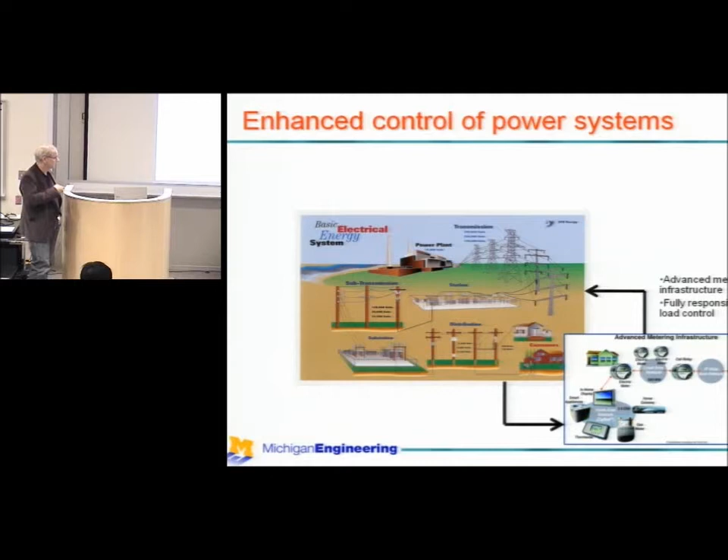So this is a traditional view of the power systems. There's a good deal of activity happening at the load end, and this is where I will focus this talk. There's also activity happening in terms of wide area control. There are issues associated with both parts, both features of this enhancement that link very tightly with cyber-physical nature of the activities. In both cases, one has to deal with issues associated with communications infrastructure and how it impacts on the physical infrastructure. I've done very little work in this wide area control aspect, and will focus my attention down more at the control of loads end of activities.

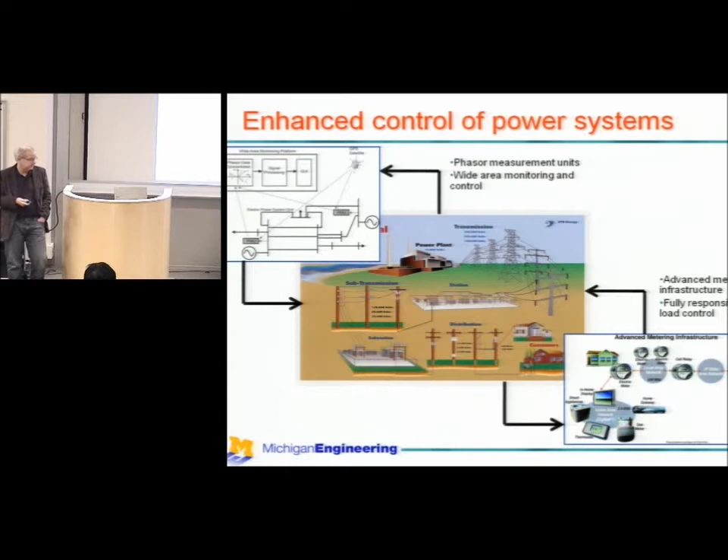Okay, so why do we want to change the paradigm that's worked for a large number of years? Well, the first reason is there's an enormous amount of research funding in the area, so of course we're going to link with that. But a slightly less cynical view of life is that there's a lot of renewable generation that's coming into the grid, and there will be more and more happening over the next few years.

And this figure just shows a snapshot of the variability inherent in wind power generation. So this is a 100 megawatt wind farm in Minnesota. You can see that the output is varying from 0 at certain periods in time. Well, if we look over here, it's 0, and then it's up to about 80 megawatts not that long after the 0 time, and then it's back to 0 again. So the variability is enormous, and it's something that power systems are not designed to deal with.

There's a lot of rooftop solar. There's a lot of other forms of solar generation that is coming along as well, but rooftop solar is embedded in the distribution system, a system that was designed for power flow from substation out towards the loads, and now with renewables that are appearing within that distribution network, one has power flow in the opposite direction, and that can raise issues for voltage control and power flow control as well.

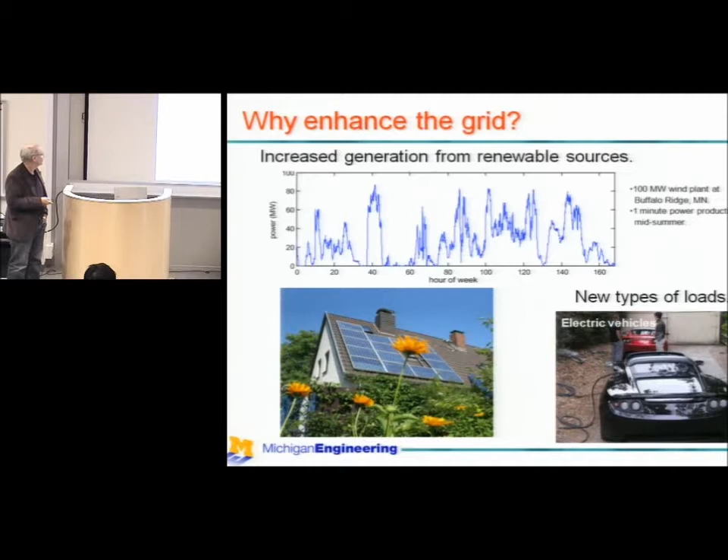The current paradigm in power systems is that load is an exogenous input. Load is what it is. When I turn on a switch, I expect to see electricity supply whatever appliance I'm wanting to turn on.

Generation tracks the variations in what's going on with the loads. There's a forecast process to get the right generation on at the right time, but the forecast always has inaccuracies. No one can tell when I'm going to turn on a light switch, a dishwasher, or plug in an electric vehicle at the moment.

The variability inherent in renewables also creates issues associated with deviations from forecast, and generation has to track those variations, which creates some issues. The generators are not designed to move around significant amounts of megawatts in a short period of time.

Under the current paradigm, the voltage profile across the distribution and transmission networks is relatively constant. It's not totally constant, but it is very much predictable, and that predictability comes from the law of large numbers associated with loads.

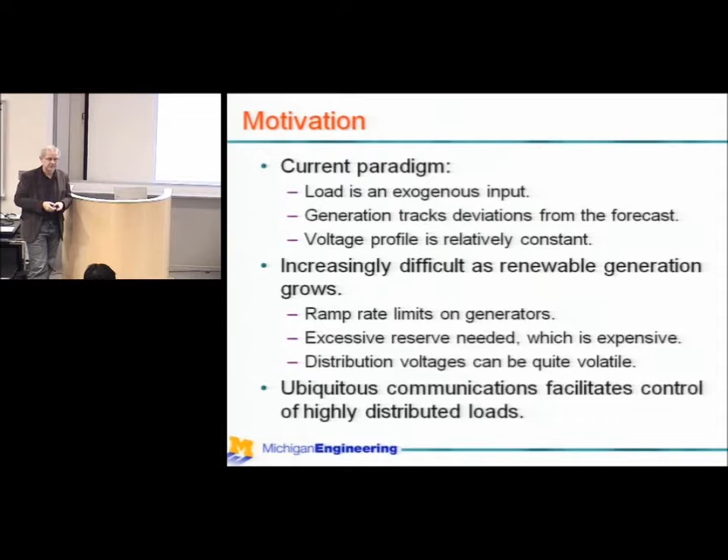And I told Tom I wouldn't mention that word, but I'll do it just once - smart meter. Anyway, the old meters were smart. I mean, I agree the old grid was smart, but the meter I used to have was pretty dumb. The old meters are dumb, but that doesn't imply the new meters are smart - they're dumb in a different way.

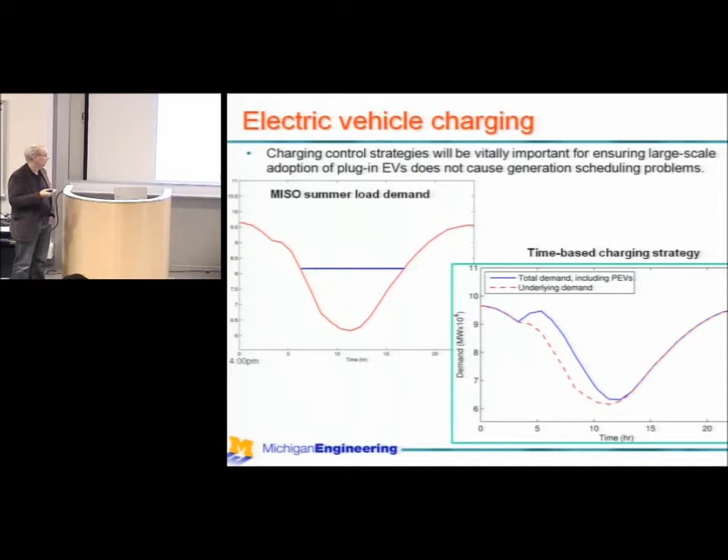Other strategies that people have spoken about are to look at a price-based strategy. In this particular case, the strategy we've implemented is to say that vehicles will start charging when price falls below a low threshold, and turn off when the price goes above a high threshold. So there's a hysteresis band built in.

That prevents chattering, and works fairly well with a relatively small number of vehicles. As the number of vehicles grows, the gain in the system effectively grows, and you start to see some jitter, until you can actually induce a bursting phenomenon. Again, the lower and upper thresholds are randomized, so for every study you look at, you don't necessarily always see that bursting phenomenon, but randomly it will appear.

It's due to a synchronization of the loads, where the price drops, enough loads see that it's now time for them to charge. They all start charging, that pushes the price up, and then they all stop charging, and you get this bang-bang type phenomenon. The assumption underlying this is one of real-time pricing, and if you don't introduce real-time pricing, you don't have this problem, but then you don't have the signals that people are talking about to drive this type of charging.

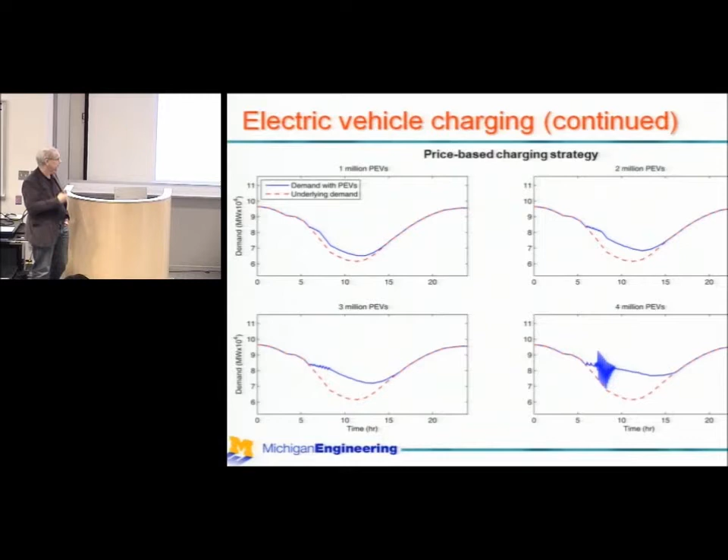We've looked at a different strategy, actually a Nash game-based strategy. What we're saying is each vehicle wants to minimize its energy cost, and to sort of decompose this cost function, the P is the price of the total demand.

It's captured in D, which is background demand, together with this average of what all the other electric vehicles are doing. Together that gives total demand, and the price is dependent upon that, and the U is the actual energy being consumed by the electric vehicle.

So this is a standard price, this is what one would pay to their utility. To make this work, we have to add in a penalty for the individual plug-in electric vehicle deviating from the average behavior of all the vehicles.

That becomes a cost function, and so we're able to show that for an infinite population, dealing with mean field theory ideas, if every vehicle minimizes this cost function relative to this trajectory Z, and if that trajectory Z is the average of all the other vehicles, then that minimum that everyone achieves is a Nash equilibrium.

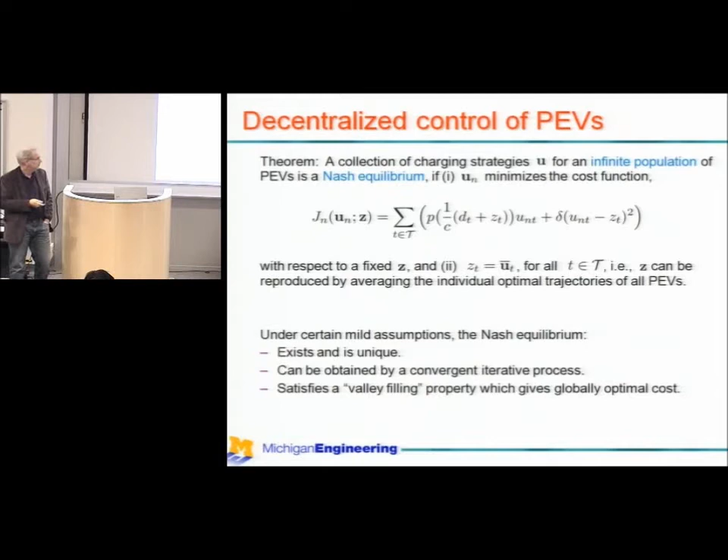And the actual penalty cost, if one assumes a homogeneous population, then at convergence, the term in the square here will actually go to 0, and so the penalty will disappear anyway. The cost penalty will disappear at convergence. Not all vehicles are exactly the same, so in a heterogeneous population, there is some cost associated with this final penalty term. But if they're all close, then that cost is very small.

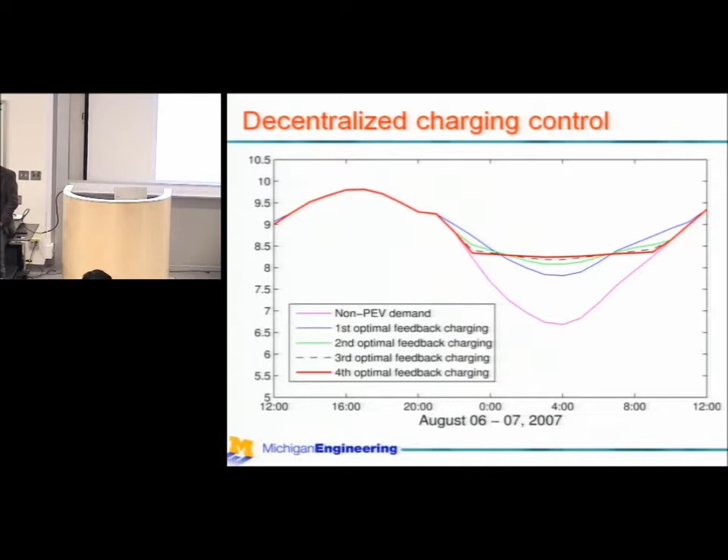And the convergence. Will the result of that be some sort of mixed strategy of randomization, or no, it's just a schedule? It's a schedule, yeah. So this would sit in the day-ahead process, for example, or it's based on forecast information, and then the plug-in electric vehicles themselves now say, okay, that's what I've promised to do over the next 8 hours, 24 hours, whatever period it is. And there's then some mechanism to ensure that they actually do follow that.

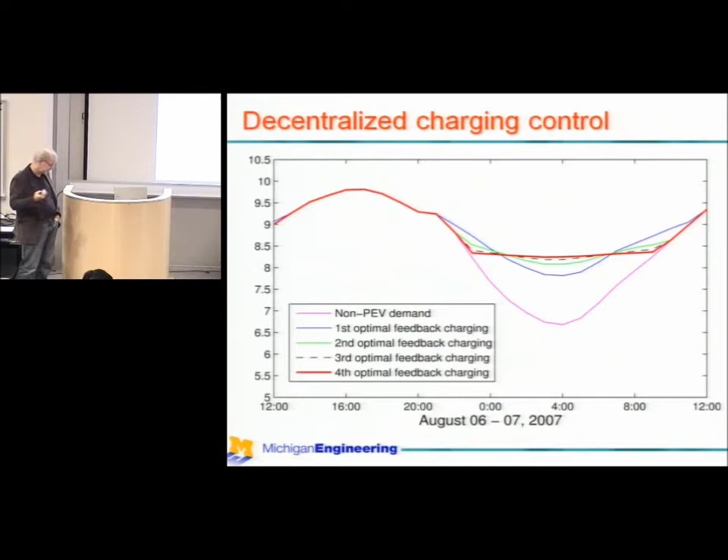So that's a great point, because it leads on to the next point, that this establishes a baseline strategy for each vehicle to follow, and that will give this valley filling condition. But then the system changes. So how can one incorporate responsiveness into the vehicles so that they can deal with things like fluctuations in renewables, loss of generation, et cetera? So to do that, we have proposed this hierarchical structure.

The idea being that the loads, we can't communicate centrally with every individual load. And in fact, even by introducing this aggregator level, the philosophy that we've adopted is that what we would like to achieve is that the aggregator sends a common signal to everybody. They interpret that signal in a way that is specific for them, but the overall behavior has a desirable form to it. And we've been looking at structures where the load aggregator sends or makes available a common signal. The load aggregator may be measuring or receiving information from a larger number of vehicles.

It might be from everyone, it might be from a random sample of vehicles, but there's the ability to draw more information back about the loads, and this is to do parameter estimation, to understand the model for the load. So the load aggregator is pulling in sufficient information back from the loads, but is signaling a common signal out to all of the loads. The load aggregator then is communicating with the system controller in a way that looks to the system controller like it's just another generator, for example. And so it can bid into the market, it can provide whatever services are required by the overall system.

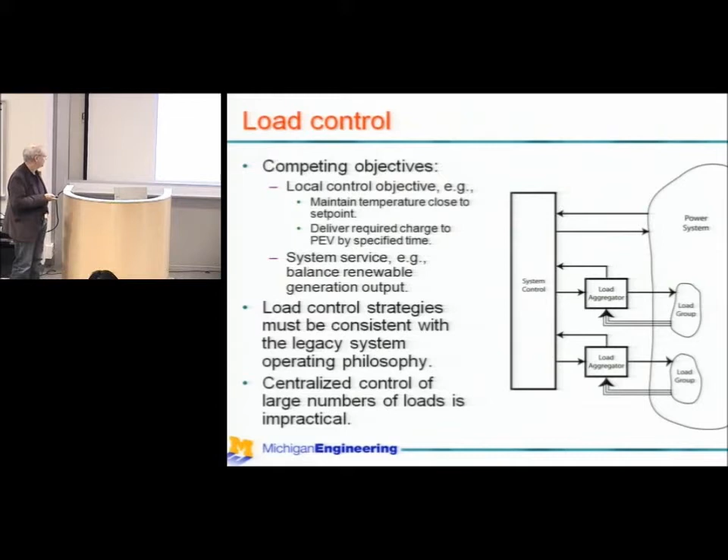And the actual air conditioner will turn off when it reaches the lower end of the deadband. It will turn back on again when it reaches the upper end of the deadband. If I move the deadband just a little bit, so if I want to increase load, I can change the set point. I just lower the set point a small amount.

What that means is that the air conditioners that were off and about to turn on but hadn't quite reached the upper temperature threshold will turn on a little prematurely, a little earlier. The air conditioners that were about to turn off because they were about to reach the lower threshold will stay on a little bit longer. And by messing with the loads at the ends of the deadband, that gives quite a good deal of controllability associated with the total aggregate load that comes from all of these thermostatically controlled loads.

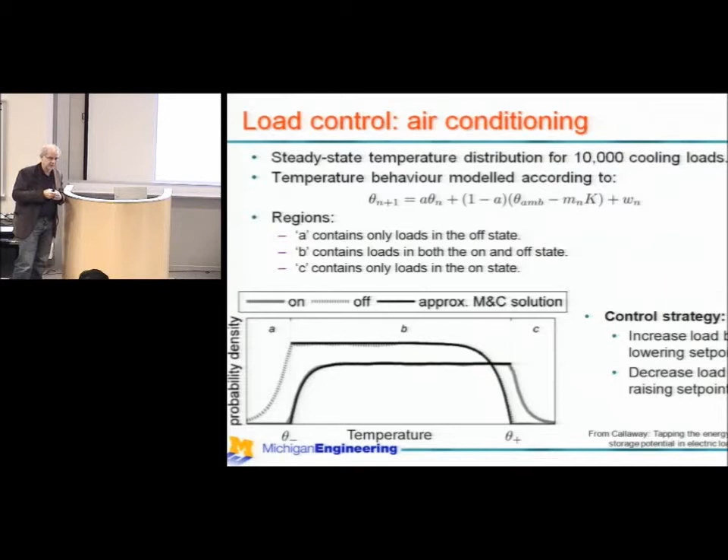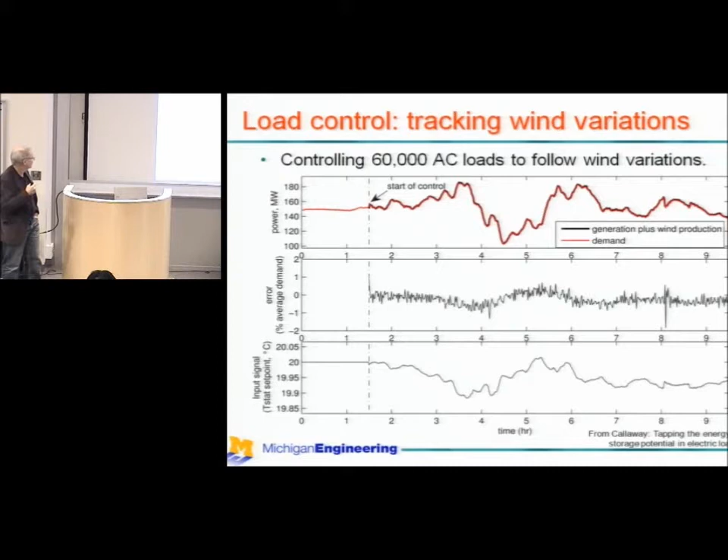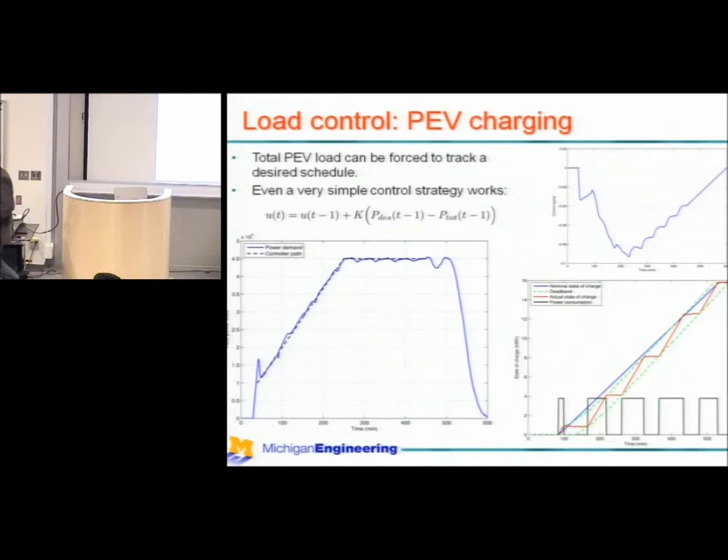Was it a global control for 20,000 vehicles, or were you modulating that? So there's one signal going out to all 20,000. So every one of the 20,000 vehicles is seeing that same control. And does your model assume that all vehicles are identical? No, it's randomized. The slopes with which they grow and decay are different for everybody.

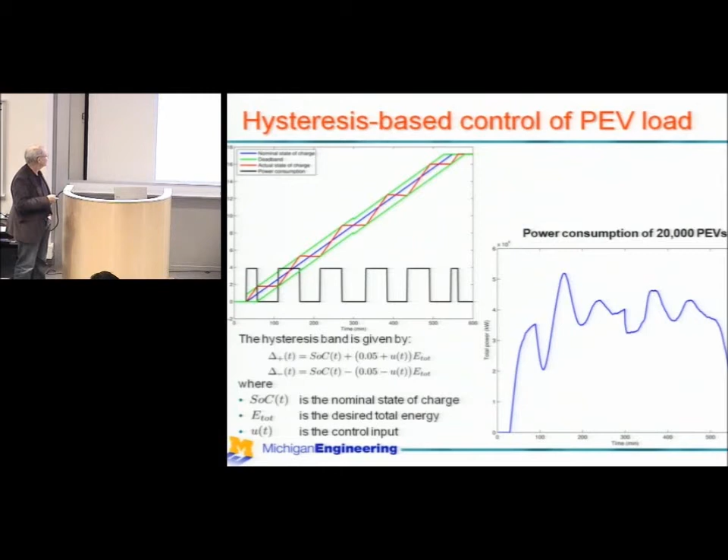Yep, they are. And there's a lot of interesting things that are yet to be explored with this. But if I go back, depending on the size of this deadband, I can get a much faster pulse train, and so I can increase the speed of dynamics of the system, or slow it down, or do all sorts of interesting things like that. So please don't go publishing this before we do. But anyway, if you do, just give acknowledgement in the right place.

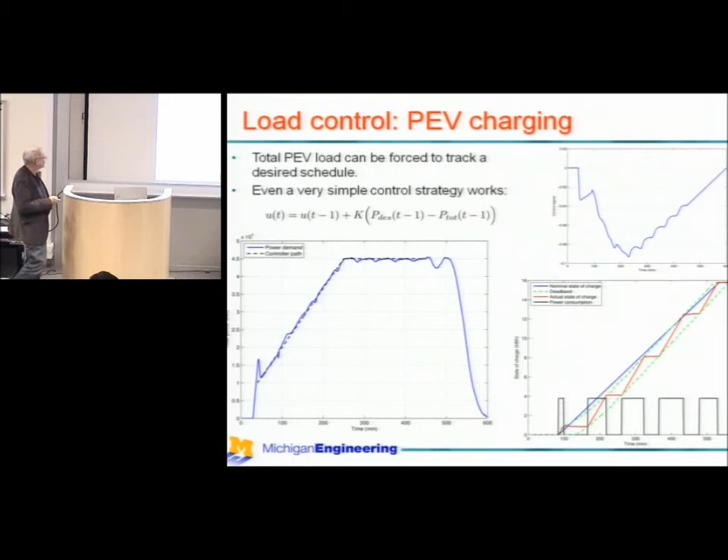Okay, so where do we want to use these ideas? We have just received an ARPA-E grant. Well, we're in the process of negotiating an ARPA-E award, which is why no research is getting done anymore, because of ARPA-E's modus operandi. But anyway, the idea is what we're calling energy positioning. We're looking at developing control techniques that position energy both to achieve economic outcomes, but also to make that energy available to be able to deal with contingencies that happen in the system.

And so we're looking at this three-level strategy. Level one, and there's some consistency, again, with the existing operating paradigm. Level one is consistent with unit commitment, where one's dealing with looking far enough ahead that you get the right generation resources, the slow devices, to come onto the system. You get them on at the right time in the right place. That establishes a nominal trajectory associated with the longer term forecast. And we're saying, well, this would run every 6 hours to update the forecast. And level two is consistent with economic dispatch. It's a simpler problem in a sense that we're saying these are the resources that are available to us. How do we best utilize these?

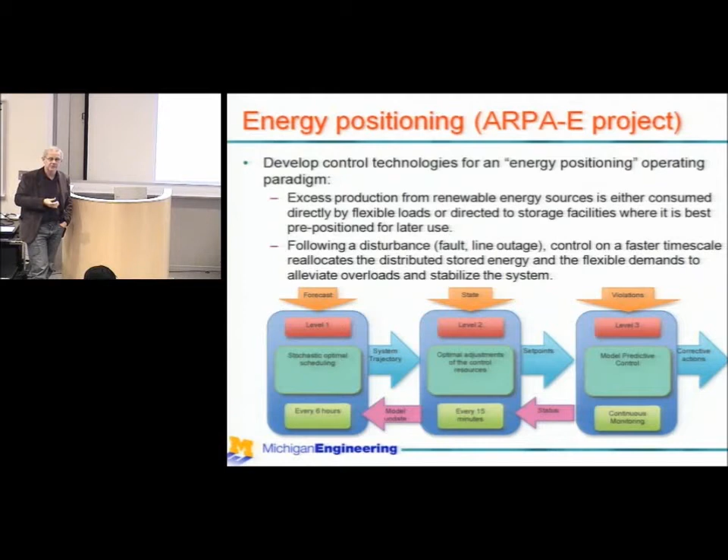Okay. The type of outcome from this control strategy is shown here. This is what's called voltage collapse. It's just a simple little 10-node power system, but it's one of the standard voltage collapse test systems. When a particular feeder trips out, if there's no control, the voltages will deviate. Pre-fault, the voltage is above 1 per unit, which means everything is nice. When that line trips out, the voltage drops to about 0.95, and then tap changing transformers start to tap, and as they tap to try and restore voltage to the loads, they actually push the voltage further down rather than raising the voltage.

And so one ends up with this degraded voltage down to levels that are unsustainable, and in fact there would be a cascade that would result from that. We have applied MPC in this case. The MPC runs on a 50-second cycle, and so you see initially these, so there's some inconsistency between the plots, but these are voltages at some of the nodes within the system. They start to decay. MPC changes some loads, and this is the load change that's occurring.

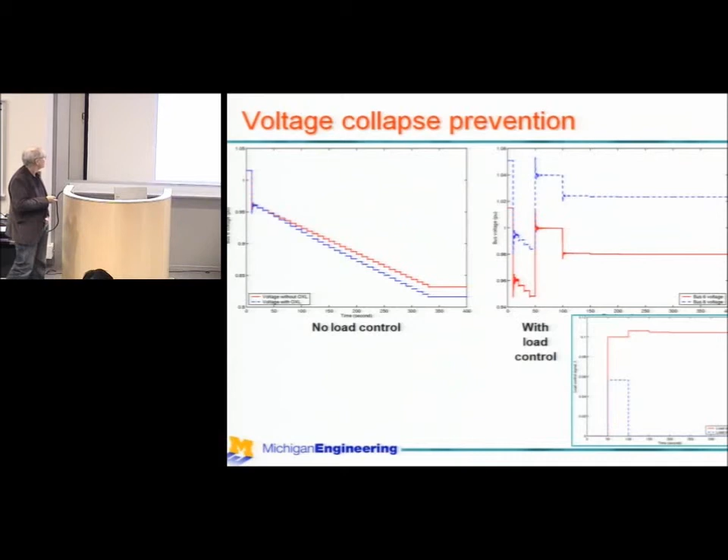So we have looked at a model that we call the differential algebraic impulsive switched model that captures the standard differential algebraic representation of power systems. So here are the differential equations, the algebraic equations. It incorporates switching into the algebraic equations. So different sets of equations will be operated upon depending upon the values of certain triggering states. And it also introduces impulsive behavior such that when this trigger is encountered, then the states will undergo an impulse based on this function h. And so it captures all of the dynamics that we have needed to be able to capture. And I suspect it is fairly generic, though I've never sat down to really think about how generic the model is.

So in this case, do you have bounds on state variability? No. Inequality between... Well, it depends totally on what your dynamic models are. So if you have a model that has a saturation limit, that saturation limit will be taken into account here. So say it's a non-wind-up limit, then you will switch from the dynamics associated with the input to that block through to the state remaining constant at the non-wind-up limit. We can talk some more about it later.

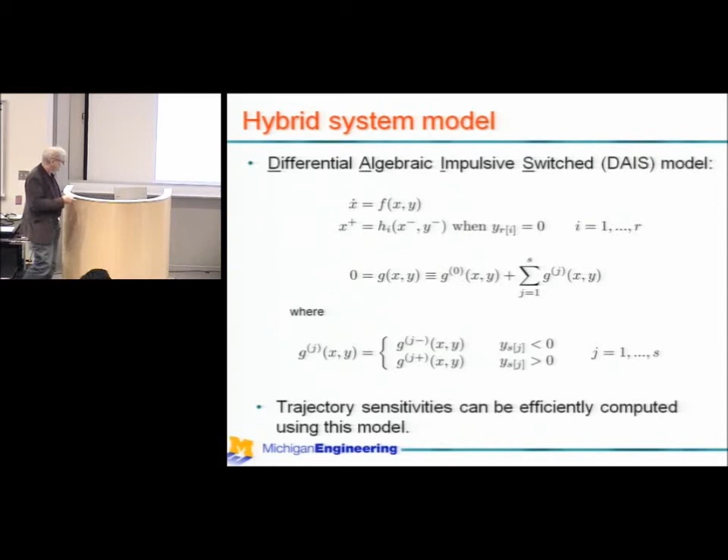Okay, so just an illustration of the type of thing that this model can capture. This is part of a wind turbine model that's used in industry. It's industry standard, and you will see there are all sorts of non-wind-up limits. And in fact, there are some really interesting interactions. When this block here hits its minimum or maximum limit, not only does that create the usual non-wind-up phenomenon on the state associated with that block, but there's a signaling over to this integrator and to that integrator that they should block as well. And when it comes off that limit, then the signal says these integrators should come off. And in fact, one can show, and we have shown, that this introduces deadlock behavior. So this model cannot actually be simulated using traditional simulation.

How does industry do it? They use really bad numerical techniques that come out of the 1970s and don't properly implement the limit switching. When you properly implement the limit switching, you need Filippov solution types of phenomena to continue the trajectory. It's like a sliding mode phenomenon.

So the type of thing that happens, again, this is associated with this model documentation, is a standard case. And when you look at the standard case, it doesn't work.

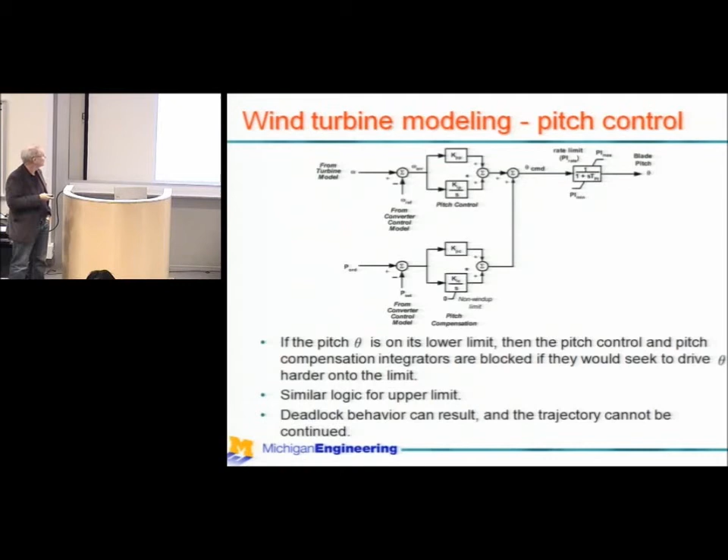The way of overcoming that is to introduce a hysteresis band, and then things work properly. But without properly modeling the hybrid dynamics, one doesn't see these things. And the industry standard simulation packages, in the power industry at least, do not implement limits properly, and so they have not noticed these things.

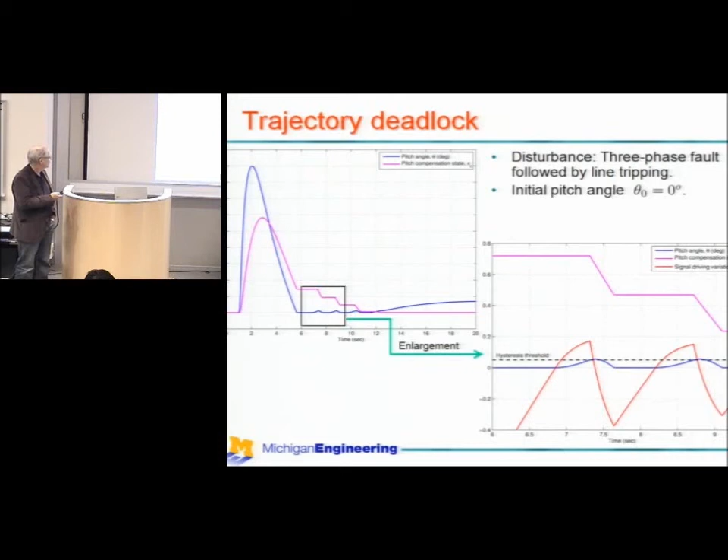Okay, so that then moves me on to: not only are hybrid dynamics important in power systems, but one really needs to couple in the cyber infrastructure. And this is very new to us, and this is where I personally struggle to really get that model right. So one approach that we have taken, modulo without any simulation results yet, but with the math cranked through,

is to capture the effects of latency in the process. So the simple example, I'm not sure how realistic this is or not, but to say there's some crucial feeder that trips and adjacent feeders overload. So now we would like to be able to schedule or reschedule loads to deal with that. So we start signaling out over our communications channel to the various different locations that should be active to prevent this overload. The increased activity on the communication system increases the delays through the communication system.

And so we've looked at an arbitrary kind of representation of saying: over a certain range, as traffic volume varies, it doesn't alter the delay at all. But then as we start to increase that traffic volume to higher levels, the time delay increases as well. I'll be interested to talk with people as to whether this is a reasonable assumption or not. But the math is interesting anyway, so why not? So that's the sort of model that we're looking at.

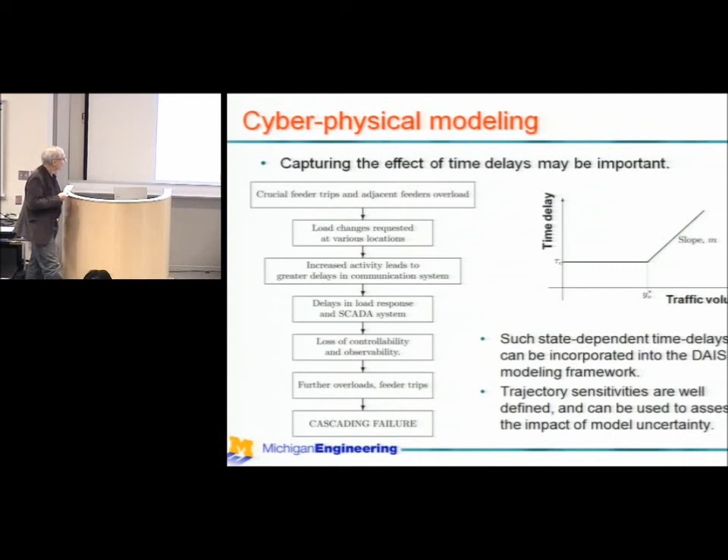Okay, how does that show up? This is some work not in terms of looking at latency uncertainty, but looking at uncertainty in other parameters. This figure shows a nominal trajectory in state space. That's the blue curve, and then we have mapped along with that, using trajectory sensitivity, an estimate of the uncertainty in the parameters. And so one can get a bound which says: nominal trajectory is this one, but if I want to take account of all of the uncertainty, then I need to be dealing with the outer limits of this behavior.

In the time domain, it shows up in this kind of way: we have a nominal trajectory, but then we have a bound that sits around that nominal trajectory. And we can ask questions about, well, it turns out the zero crossing here is a significant event. It's a protection operation event. The nominal trajectory does not cross zero, and so if I was just running the simulation, I would believe that everything was great. But in fact, if I take into account the uncertainty in parameters, then I really do see that there's a finite probability of encountering a protection operation which may incur the start of a cascade.

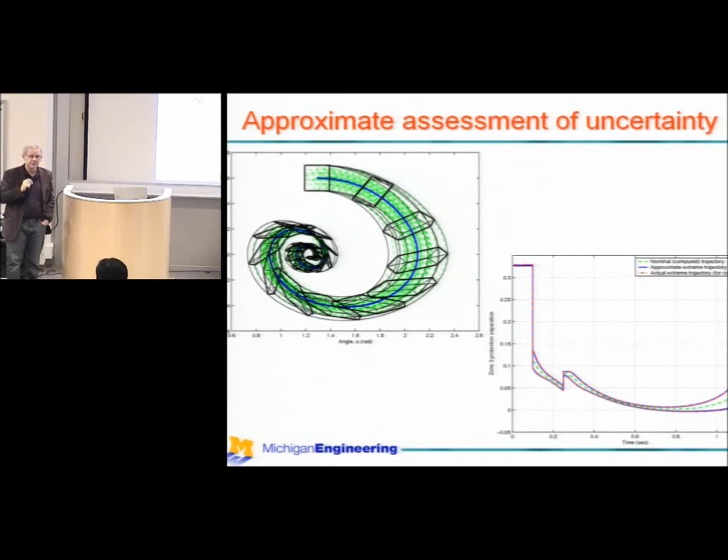This is all non-linear, non-smooth. You can see the switching that's happening there, and it provides us an ability to get an approximation to this bound, but not the exact bound.

Okay, so in conclusion, I've wandered a convoluted path a little bit, but let me just conclude by saying there's significant actuation that's available from coordinated control of loads. There are issues associated with that in terms of what's the right control structure, how do I deal with latency, interoperability, data security, all of these things we've heard about through this symposium. But there are social issues as well.

What are the incentives I need to provide to consumers to participate in fast acting? It's non-disruptive. They don't even know it's going on. But in the consumer's mind, they really don't like their utility, so why should they help their utility? And so what incentives are required to make consumers or help consumers understand the benefits?